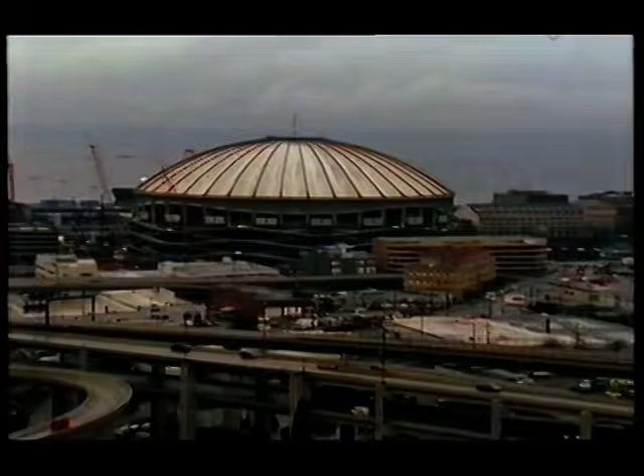From the very start, they knew the project was going to be their most difficult. Oh, on a scale of 1 to 10, the Kingdome is a 15. And it's not just the complexity of the structure itself, or the size of the structure, it's the political climate surrounding this project is unbelievable. That's been a little intimidating, I think, for everybody, just because there's so much going on. There's such a circus happening just beneath the skin of this whole project. You almost have to realign your priorities every morning and remind yourself that, hey, we're here to do a job. I have to go to work.

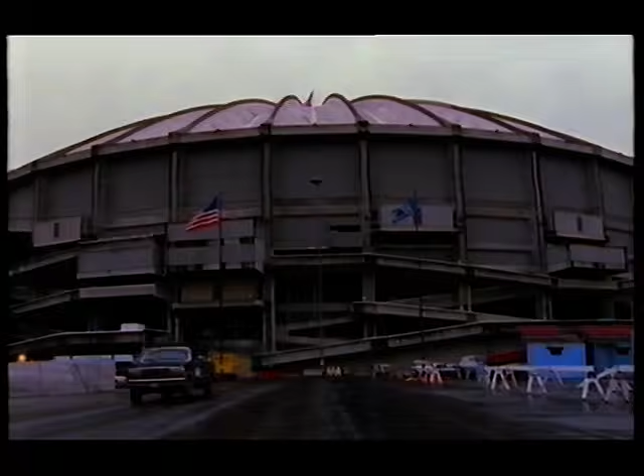The Kingdome is home to the Seattle Seahawks, who are owned by Microsoft co-founder Paul Allen, third richest man in the world. He's decided to build a new stadium for the team. But first, he needs the publicly owned Kingdome destroyed.

Midfield. Great drop for Pittman, end zone, touchdown.

These plans have been strongly criticized, and the project is taking place under intense public scrutiny. There was a couple billionaires that came in. They said they wanted the public to build them a professional stadium, and they said we want it at this spot where the Kingdome was, which was a functional building, which we just built like 25 years ago, and it seemed absolutely moronic to demolish it.

It has to be a political project. I mean, we're dealing with one of the owners of Microsoft, Paul Allen, and his company is Vulcan and First and Goal, the Public Stadium Authority, which represents the taxpayers up here. Turner Construction, who is a client of ours and very important to us to really understand exactly how we fit in the political scheme of things. But the bottom line is the reason we're here is to bring the structure down safely while we minimize impact on the neighborhood.

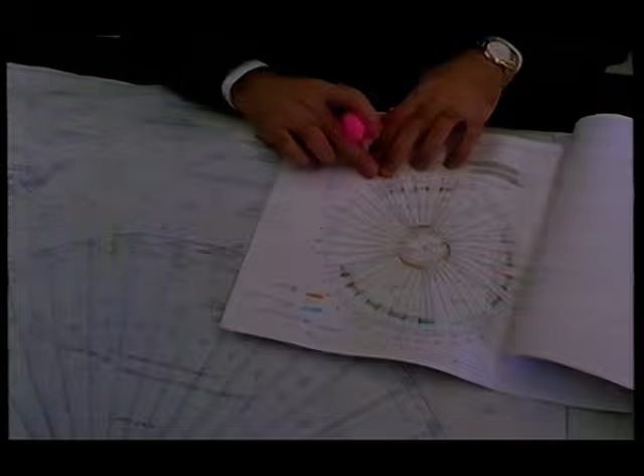Mark Loizeaux has been planning the demolition for 2 years, but the Seahawks have a winning streak, and the start of the project is delayed by a month. The main contractors for the new stadium, Turner Construction, start ripping out the interior the moment the Seahawks lose a game. They've got a very tight schedule. If we have to get pushed into the middle of April with the demolition, bringing the building down, then we've got some problems with the schedule. So that was one real concern, is making the middle of March with demolition.

CDI finally get their hands on the building just 2 months before the scheduled demolition date. We're just getting started, and we have, counting down, not much time. The whole roof is like a huge saucer, and if it hits in one piece, we really have problems with vibration. So if you look up, you can see that we have 40 different ribs coming down, and then we have a poured concrete grate in between each rib. So it's not only the idea of having to fell this structure to get it to pull away from the adjacent exposures, but to break it up sufficiently so when it hits the ground, it will minimize the vibration to the surrounding properties. And the real key is the timing.

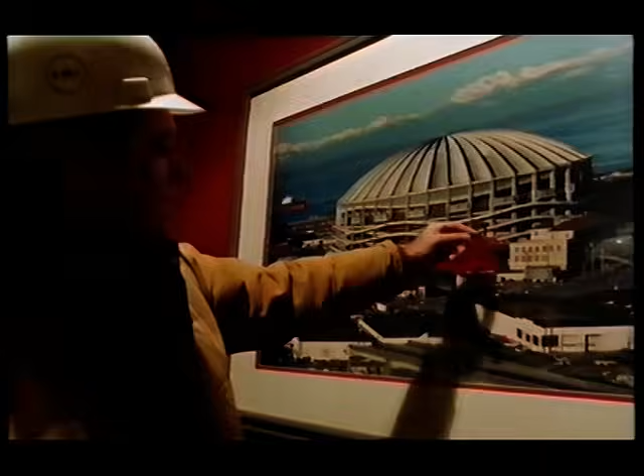It's only now that brothers Mark and Doug Loizeaux can check the blueprints against the real structure. As long as this hits first, and then I would go with this second. The primary areas that we'll be attacking on this, we've got the compression ring, which runs around the top. We have the tension ring, and we've got, these are called the XX columns, and another column row inside. So basically what we want to do is get the thing to fold in on itself.

One of the greatest things we have to overcome here is how to deal with the amount of weight that's coming down. All in all, in the above-grade structure, you've got about 110,000 tons of concrete in the superstructure of the Kingdome, and we've got to get that falling at different times slowly. We don't want that vibration to be sent over to adjacent properties.

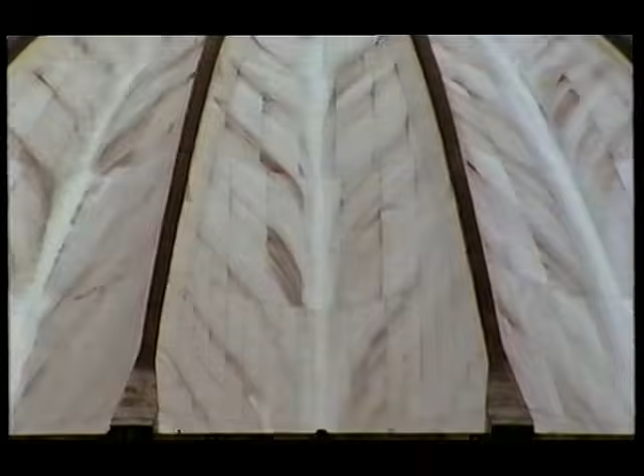Directly to the west side of the King Dome are the homes on Occidental Avenue, and they are most at risk. Tremors caused by 100,000 tons of concrete hitting the ground could cause cracks in walls and other structural damage many blocks away.

As well as controlling vibration, Mark has to worry about where pieces of the King Dome might fall. Very close along the east side of the King Dome runs a mainline railway that carries all the freight and passengers from the west coast to Canada and Alaska.

The distance from the outside face of the XX column over to the close set of tracks, it's about 62 feet. The main line is another 35, 40 feet further over. So actually, even if one of these columns fell out its full height, that would be bad. But they won't. You can see how close we are in proximity to the King Dome.

We're establishing liability agreements, certainly our legal department and our risk assessment folks. And we've had meetings for several months with both the construction company and Controlled Demolition, which are the folks that are actually going to do the implosion. So that everybody knows everybody else's needs, and we're all quite certain what to expect and what to be prepared for.

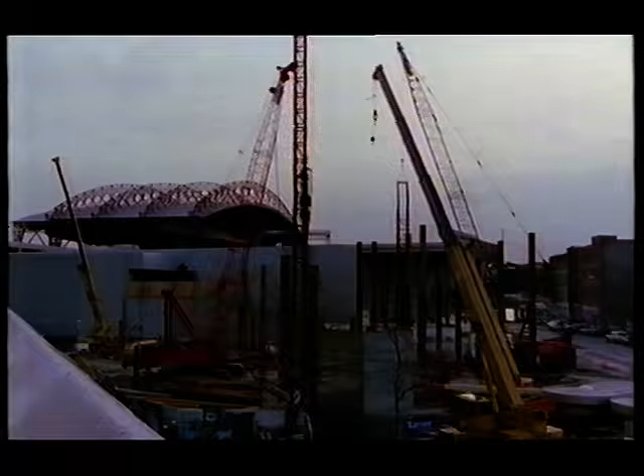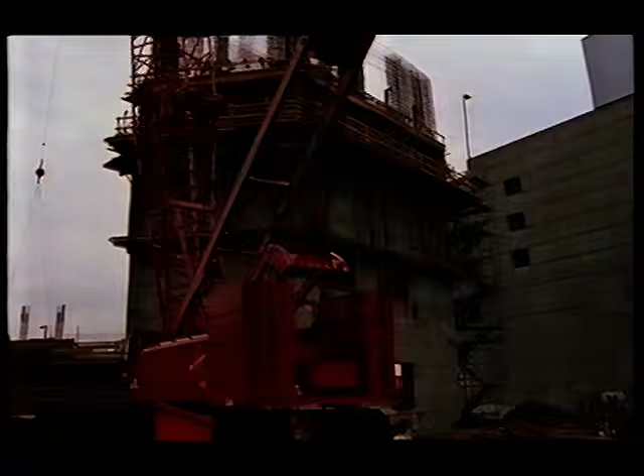To add to Mark's problems, the new stadium is being built to a strict deadline, so its stair and lift towers are going up before the King Dome is demolished. The foundations that underlie this stair tower and the one over there are absolutely critical to the whole new construction schedule. If something were to happen here, for example, with column number 39, I was just stepping off the distance just to check it. If one of these got loose and got into the stair tower, it would automatically push back stadium construction by months.

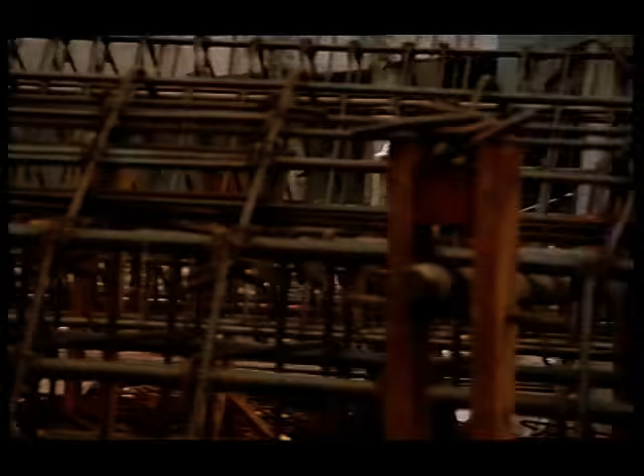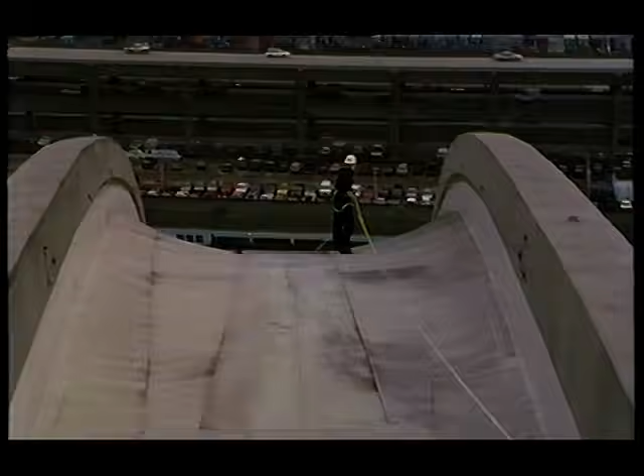The Loizeaux have never before had to work on a roof as high and as steep as the Kingdome's. Doug Loizeaux and Ray Zukowski, a CDI supervisor, are trying to solve the problem of working safely on the 300 feet high pitched roof. They're going to fab it on the ground. They're going to prefab it. They're going to roll it in. So it's rolled into itself. Come up, pull it off, lay it on the ribbon. The roof is going to cause more problems than anyone realizes.

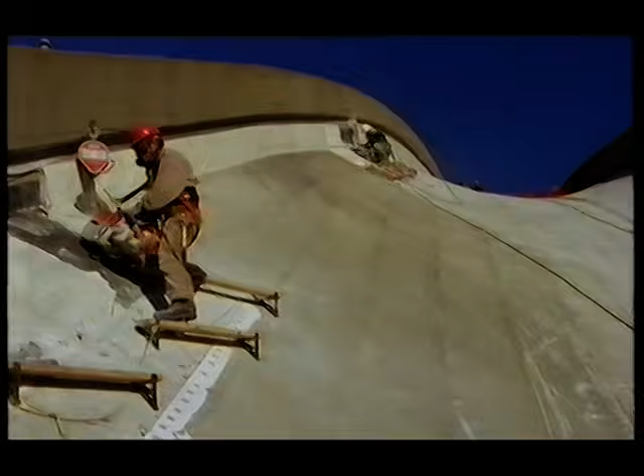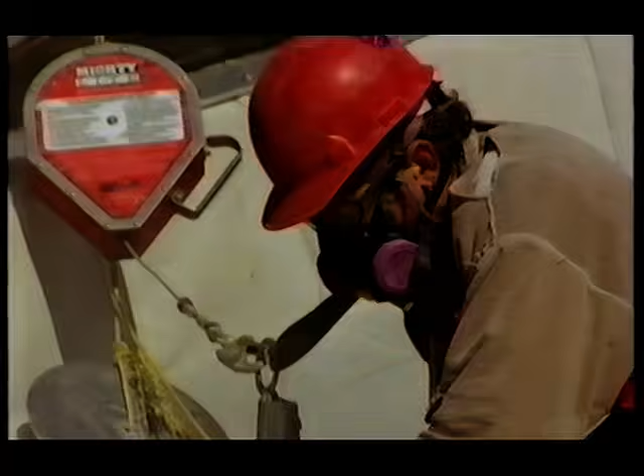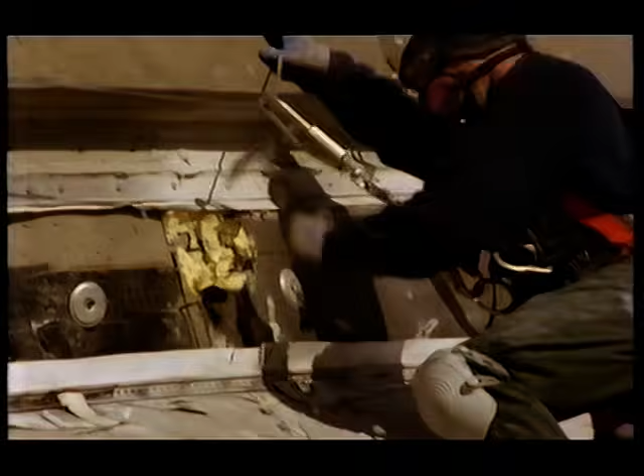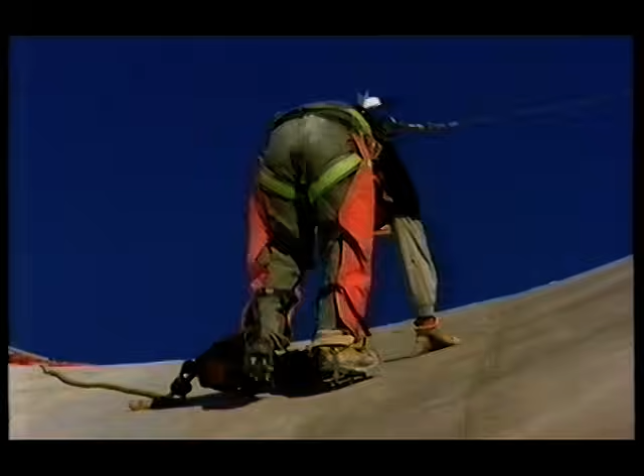Turner Construction planned to use recycled rubble from the Kingdome as foundations for the new playing field. But the roof has a rubber and styrofoam lining that will cause contamination if it isn't removed first. No one knows how long this is going to take. Climbers have been recruited for the job, but it's back-breaking work. Doing anything takes 10 times as long as it would normally.

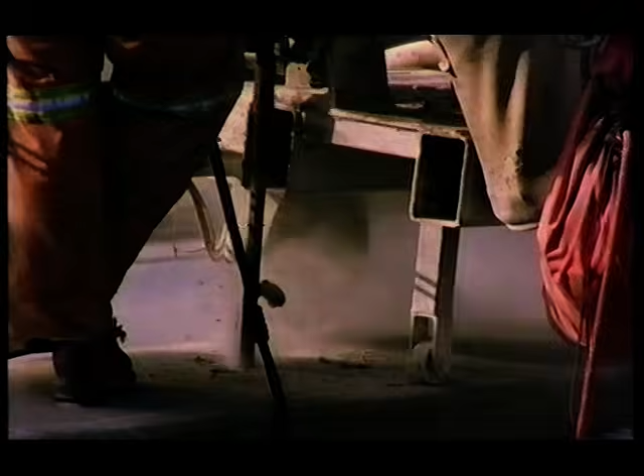Almost 6,000 holes have to be drilled before the explosives can be inserted into the columns and the ribs of the Kingdome. It may not look it, but it's high-precision work. The holes have to be accurately positioned and drilled to just the right depth. This will take several weeks. But the drillers are delayed waiting for the plastic to be removed. After 3 weeks, it's clear that everything is falling way behind schedule.

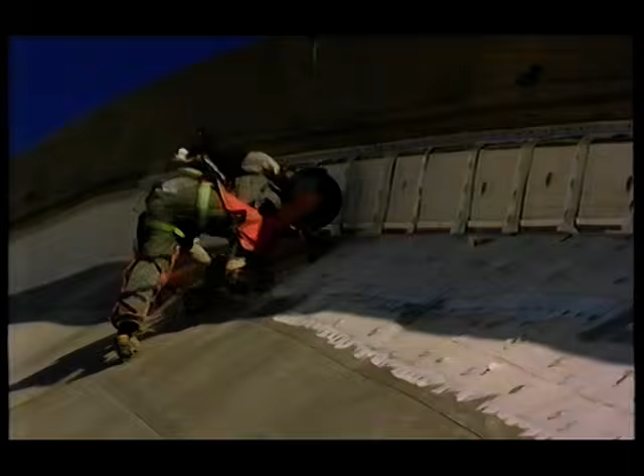Our slowest point is still the roof removal. It's just a slow process. Their original estimate was to do a bay a day. Right now, they've been there for 3.5 weeks, and they've done 4 bays. Plastic covering was fixed to the roof by steel pins. These also must be got rid of. They're very thick. They're approximately 7 inches tall.

And to remove the roof, they cut off the top section. Most of that's done on an angle. So that basically turns into a 7-inch nail pointing upwards. Our potential problem is if someone were to slip and fall, you would land on that, you would become a pincushion. I think there's almost 1 million of them up there. Now in the flat section alone, that took one man almost 2.5 days to do with a small grinder taking everything down flush. So if you did fall, there was no chance of an injury.

If I had been the first person here to look at this, I don't think I ever would have taken it on. It's so intimidating. It's so big. And the heights we're working at, just all around, walking on the roof. I mean, there's so many inherent problems and dangers and logistical difficulties that it's been a bear.

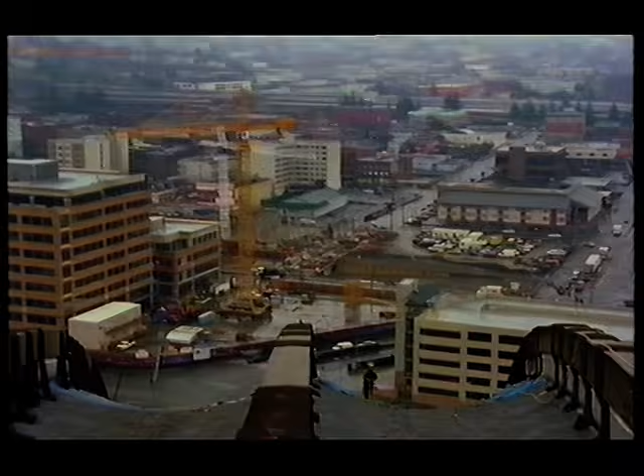Faced with the log jam on the roof and the delays caused by worsening weather, CDI sees a tight schedule become even tighter. But there's little they can do except wait. And so another job 1,000 miles away becomes no problem. It's the Mapes Hotel, Reno's first hotel casino. Like the Kingdome, it's a landmark building, a piece of Reno history. And like the Kingdome, there's been a lot of arguments about its fate.

Changed the image of Reno overnight from a hick town, cow town, to a sophisticated little city, that one building. Some of Hollywood's most famous stars were guests here. Marilyn Monroe, Clark Gable, John Huston, Eli Wallach, Montgomery Clift, Frank Sinatra. We've been fighting for 2.5 years to save it, and with not too good results. The campaign to stop it being demolished has failed.

It's much smaller than the Kingdome, but on closer inspection, it's not as easy as it looks. On one side, it lies on the bank of the Truckee River, which is clear and so far unpolluted by debris. And on the other, on busy Virginia Street. Same premise that we had on the Herald's building. Doug is shocked to discover the hotel isn't safe. He calls a press conference to announce the bad news.

The structure is not built as we anticipated. It's very lightly constructed. There's very little reinforcing in the building, and the concrete's in pretty bad shape. So the decision that was made to take the building down is a good one. I know a lot of people felt really close to this building, from the historical aspect, but this building really isn't sound. They've also just found out that a structural girder connects both wings of the hotel.

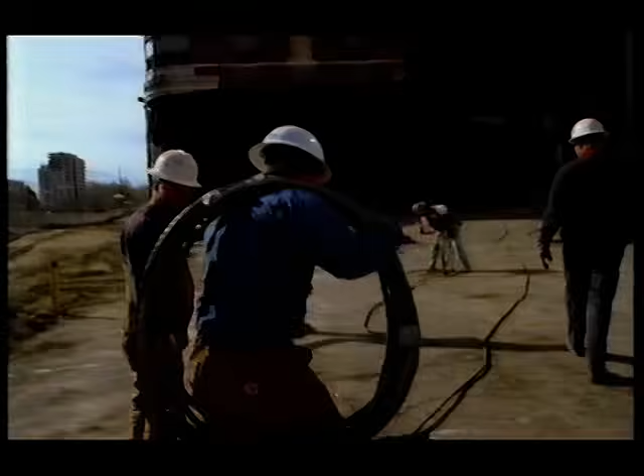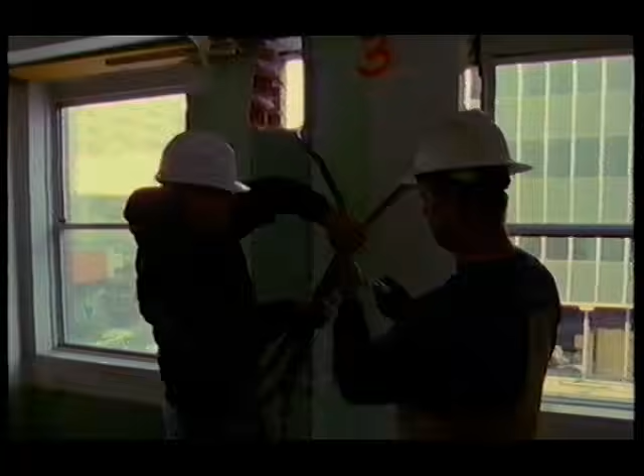Keep in mind, we don't make buildings do things. We want them to do what they want to do, come down, just our way. It's fighting with me right now. It doesn't want to cooperate. Mark's solution is to use steel cables in the building. They tie columns in the front of the building to columns at the rear. When the hotel collapses, this should prevent the walls falling outwards and should pull the front of the building away from the street. The cables need to be as tight as they can be.

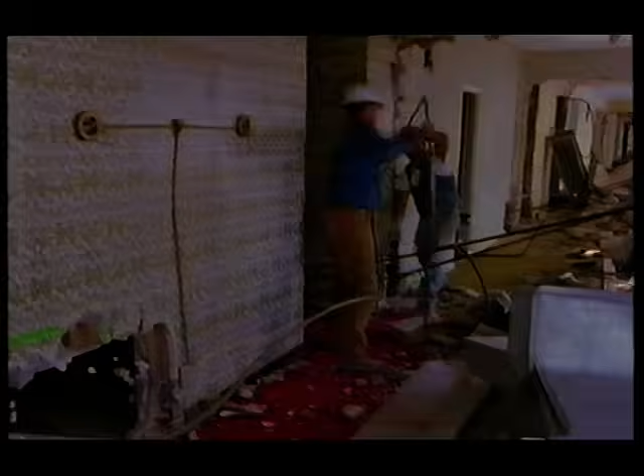What they're doing here is they've already put plastic on the windows if they could. While this goes on, Mark and Doug hold a brief meeting to discuss what to say if the job goes wrong. As far as I'm concerned, we will have material in Virginia and the Truckee River. For those of you who never got a chance to look, all those bump-out bay windows are just set in there with friction. They aren't even pinned, and they probably are going to come out. If you are in the vicinity of media or people who are interested in what is going to happen, let them know this is what we expect. If we do better than that, thank you.

It's the morning of the demolition. The police have talked through the countdown by Doug. You don't need to sweep your people again. Tell them if they see something, stop the countdown. Meanwhile Mark takes the last chance to steer the media in the right direction. It's a very light building, and that means it's hard for us to move it away from the Truckee. It's hard for us to move it away from Virginia. So we can only do the best we can.

Jamie's clear. Hook up the blasting machine. Jamie's all hooked up. Chuck? Still got a minute, Doug. Ray, are you clear? In the red. All right, here we go. 10, 9, 8, 7, 6, 5, 4, 3, 2, 1, fire.

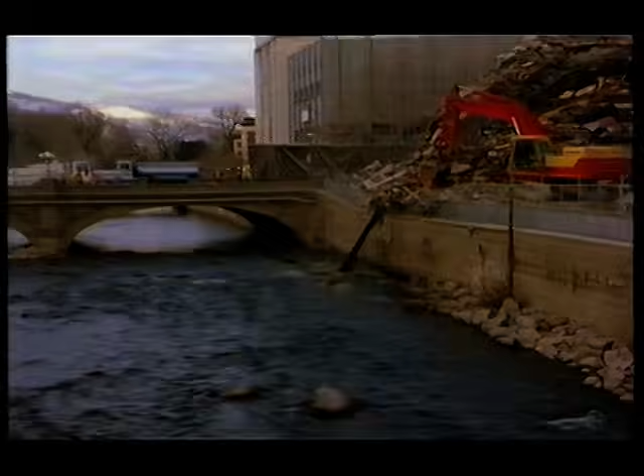You see it cut through. I went in. I pulled the back 2 columns, the next 2 columns, and pulled them forward 2.5 delays. I cut straight through the way you had it originally. I'll tell you what. And I just shortened it. I kept pulling forward. This corner almost was parallel to the river. Well, it was now. It moved in. The rubble, though perilously close, has not spilled into the Truckee River, except for a few pieces of stone.

Look at the rubble, it's beautiful. All right. Breakage is great. Good job, sir. I think your bomb squad could have done... Good job. Nice image, that flag coming out of the dust there.

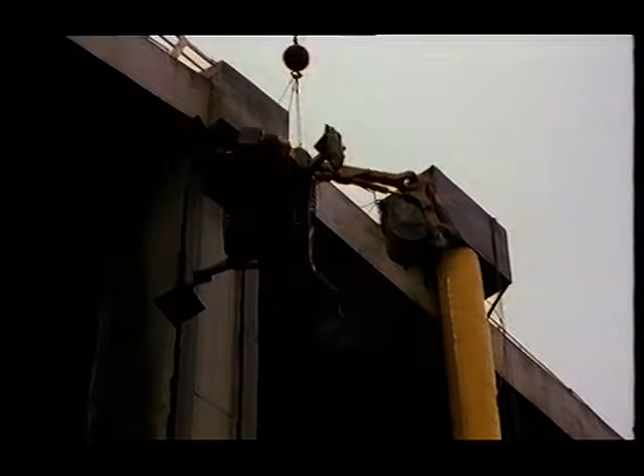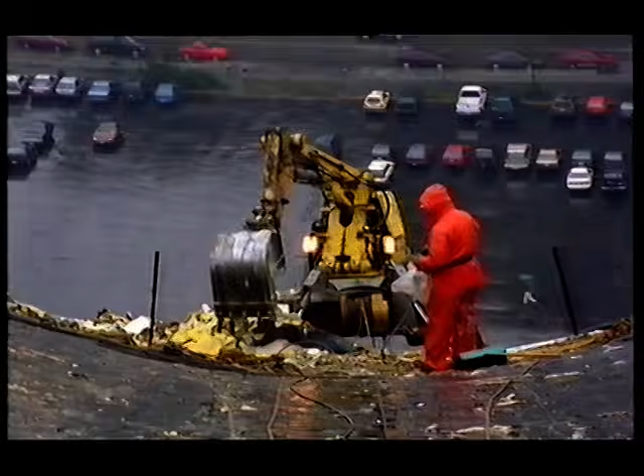But the problems of the Kingdome will not go away so easily. With the walls and cladding now removed, the supporting columns have been revealed. The Loizeaux team can finally get down to their work. And they've found a mechanical solution to the delays on the roof. It's a remotely controlled digger. Work on the roof speeds up at last, but the delay will add to their pressure.

The scheduled demolition date is just 4 weeks away, and in the dead of night, the first consignment of explosives is delivered. Mark Loizeaux thinks they'll need 2 tons, a massive amount, 50 times greater than was needed at Reno. It's such a large amount, the order had to be placed before their plans were finalized.

Now they need to do a test explosion on the columns holding up the dome to see if their calculations are correct. Their biggest concern is the larger outer columns, called the XX columns. What's important is these columns are really the key to the whole project. In certain areas, we have to drop these vertically. Other areas, we have to use them as a hinge to help fold the walls in. The steel is so heavy in this column, and we're only blasting 2 holes. We aren't going to displace the steel.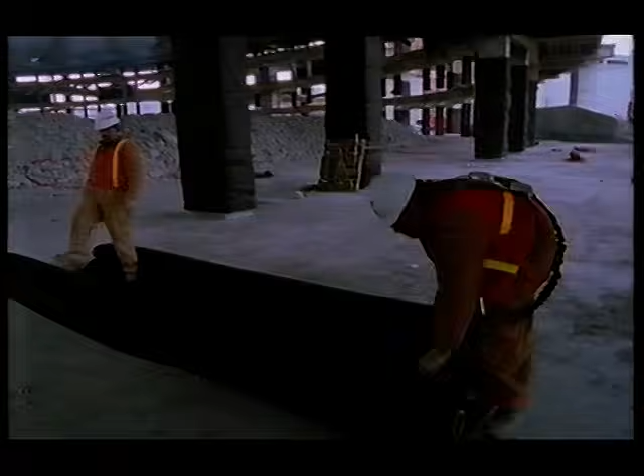The areas of the column to be blasted are covered with wire mesh and a black fabric to hold back flying debris. Okay, Jim, we're in position. Everything checks out, and I've got accountability for everyone. Okay. Fire.

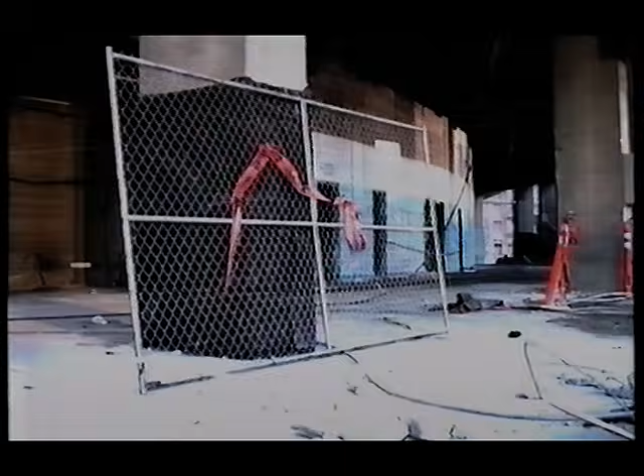The dynamite was powerful enough to displace the concrete, but it's only blown half of it away. It means the columns may not fall properly and could damage surrounding properties. Mark and Doug meet to work out why this happened. They suspect the holes are in the wrong place.

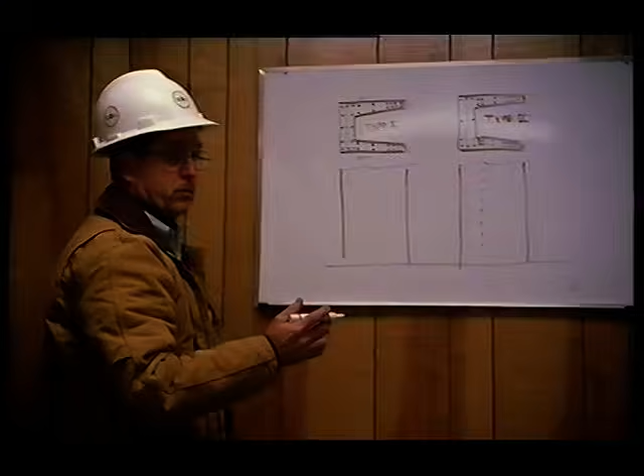Basically, the energy is going the direction of least resistance. Everything is coming this way because of the support line here, the support line here, and the drilling operation, call it quality control. That's going to want to push that column backwards. Yep. It's going to be fighting against the tension of pulling those columns in. I mean, these columns will reach all the way across Occidental.

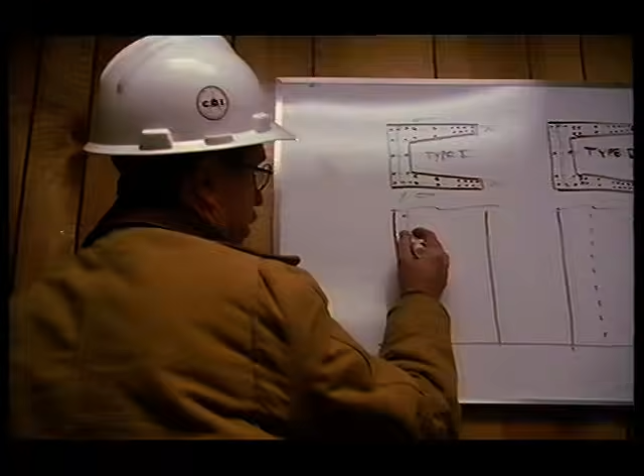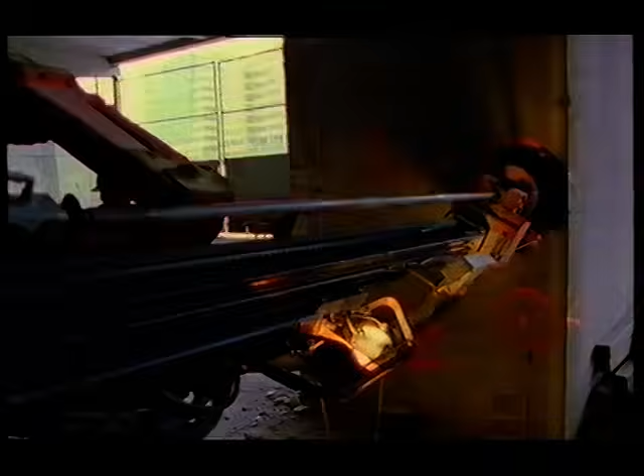I think that we need to do away with this hole, re-drill 2 more holes on the y-axis and every single column on plaza level. I don't know that you want to do away with those holes. I think that you want to load both of them. Oh, that's a thought. That's great. Extra holes have to be drilled, causing further delays.

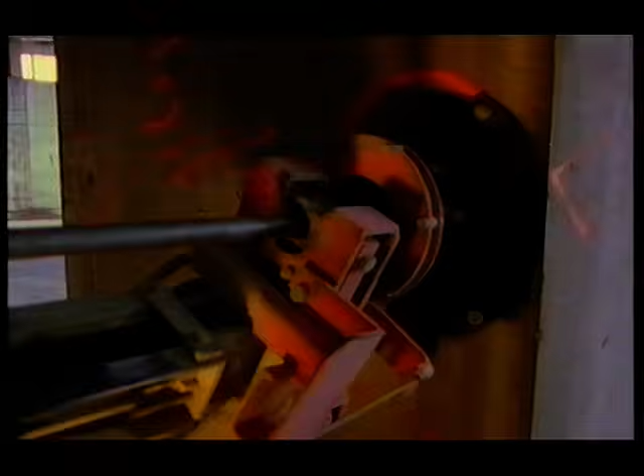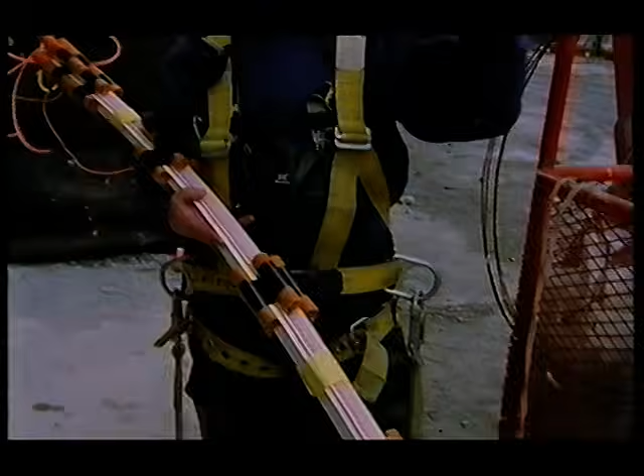But the Loizeaux have made one decision that will save them a lot of time. Way back, we decided that it would be a heck of a lot easier loading these very deep holes if we pre-made the assemblies. And since the loads were pretty consistent, we decided that we could take this plastic channel, pre-cut it to a determined length, and space the charges out on it. What this saves us doing is, instead of going to a column, loading your primer charge, putting sand into this exact dimension, putting another charge, putting sand in, putting another charge, putting sand in, you just slip it in, foam it out, and it saves you 5 minutes a hole.

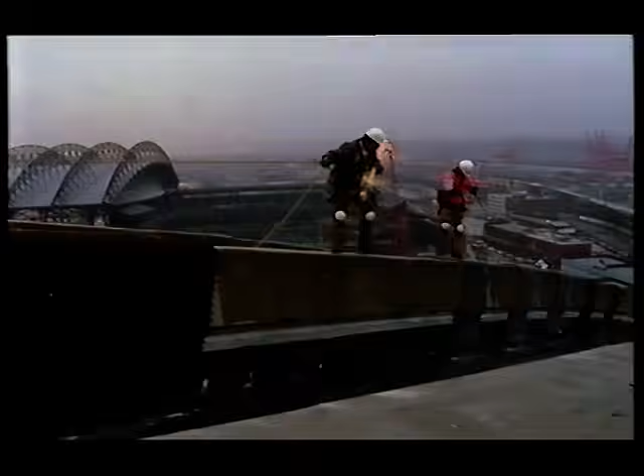The prefabricated charges are laboriously carried up to the 300-foot-high roof. Sure, take one. There are over 400 of them to be loaded into the roof ribs. Inching slowly down the ribs, they don't have time to enjoy the view.

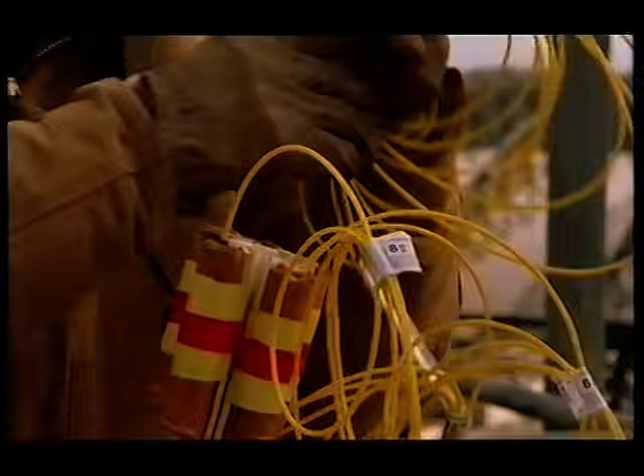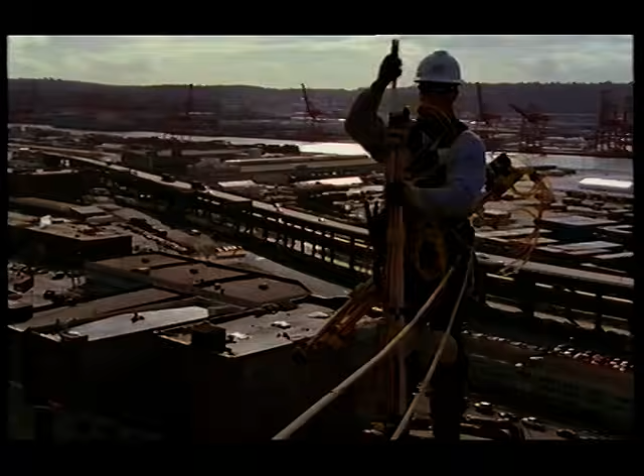There obviously are hazards inherent to working in an elevated place like that, and the ribs themselves are very narrow. And you've got all this climbing gear on, and you're trying to hassle with ropes, plus you're trying to carry charges, plus you're trying to carry stemming. So that's really the only part that gets it all interesting, the fact you're trying to juggle so many different operations at once. The charges are spaced throughout the 6-foot-thick ribs. Each section of the rib needs a different charge, and the work is carefully monitored.

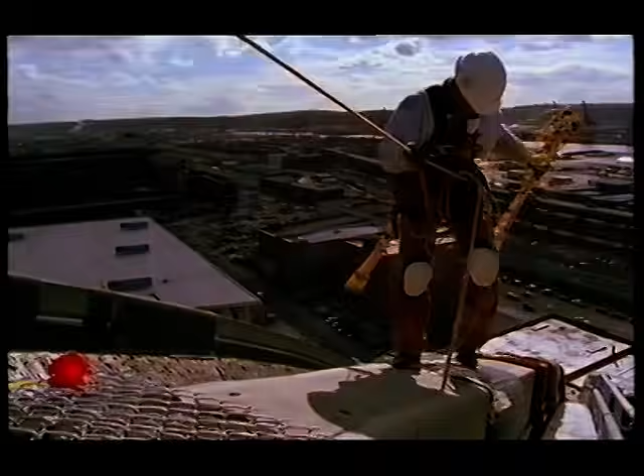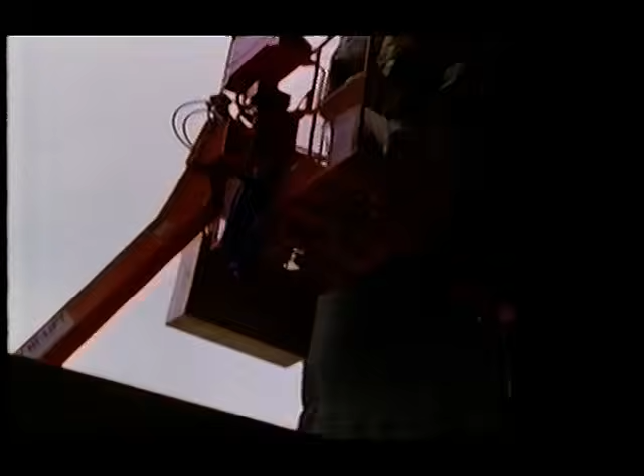After these have been loaded, it's the turn of the 145-foot-high columns. Access is difficult here too, and perched on an exposed 100-foot man lift, the task seems insurmountable. I think the biggest problem with this job has been time. It just seems to keep slipping away from us. And there's so many concurrent operations going on.

There's so many things that this can't happen until this is completed, and we're crawling all over top of each other. We've got 3 man lifts working on the same column. It shouldn't be happening. We're working on Sunday. Again, it's just getting down to crunch time, and we've got a week left, and it seems like we're close to being finished, but there's a lot of work here to do yet.

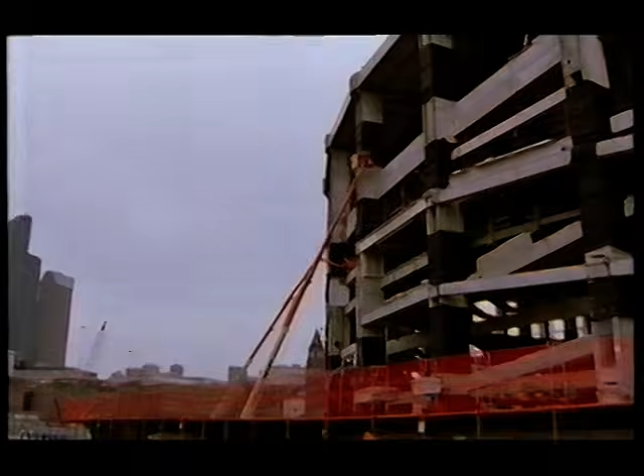Ray thinks Stacy Loizeaux deserves a reward. Lollipops. Yes, Ray has very calculatingly implemented the star system on this job. So a good deed gets a silver star. If you accrue 5 silver stars, you get a gold star. Gold stars are hard to come by. I've got 2 now, don't I? 2, right? So what do you get if you get a gold star? A gold star.

It's now just 5 days to the scheduled demolition day. Despite the lack of time, the Loizeaux team are beginning to feel that they will hit their target.

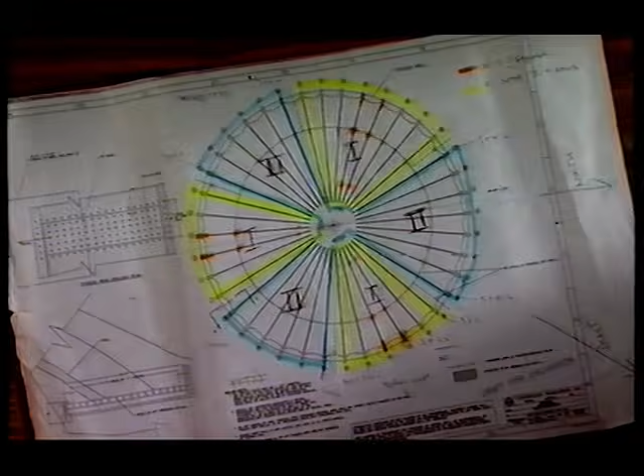Yep. Stacy and Ray begin to connect up all the charges which are now in place in the roof ribs. Making the roof fall down correctly is the key to a successful job. Mark has worked out a way to reduce the vibrations when the dome hits the ground. His plan is to make the dome collapse in different sections that he calls Phase 1 and Phase 2.

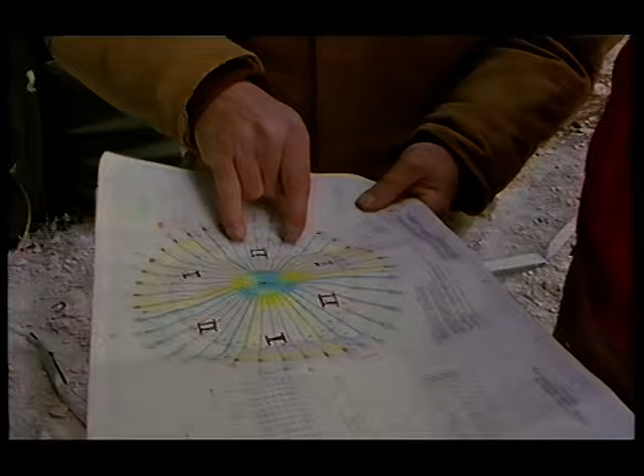The thing that I want to do is swing this in. We're in Phase 2 right here. I'm thinking seriously about releasing all of these simultaneously, Doug. There's a whole lot of advantage in doing this. We keep down concussion. Each rib and column of the first half, the yellow section, will be detonated separately 1.5 seconds apart. Then the blue section will be exploded all in one.

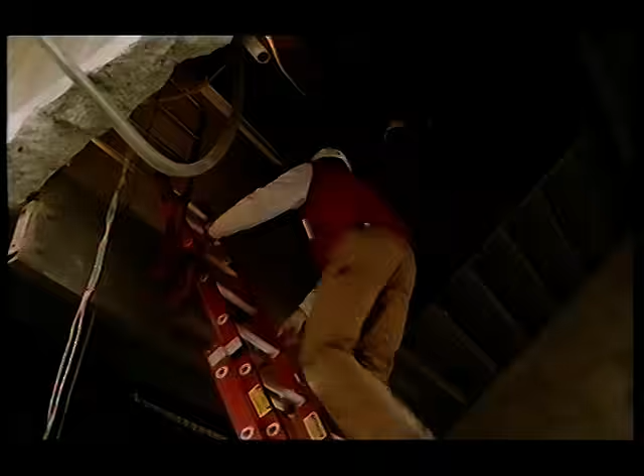And if we let that rotate over here, in the middle of Phase 1 here, Phase 1 here, Phase 1 over here, it's going to drop, and there's going to be a deflection in the tension ring. The ribs right above that are going to fire, and also the tendons up around the compression ring at the very top will fire. It creates flexibility in the center of each of the 3 Phase 1 sections. And as they begin to depress, sequentially, the columns are going to start firing out from that into Phase 2. Those two, I'll step back.

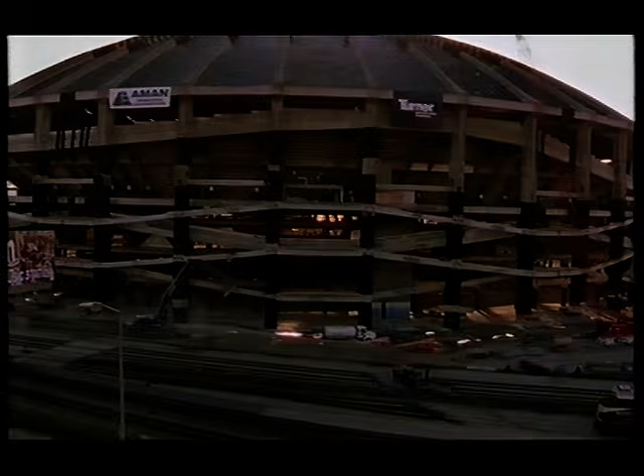They hope to control how different pieces of the Kingdome fall by using timed detonators. The detonator is initiated by the detonating cord, which is clicked into the J-clip. When the cord detonates, it sends an explosive pulse through the shock tube. The shock tube then hits the detonator itself, and the internal timer burns.

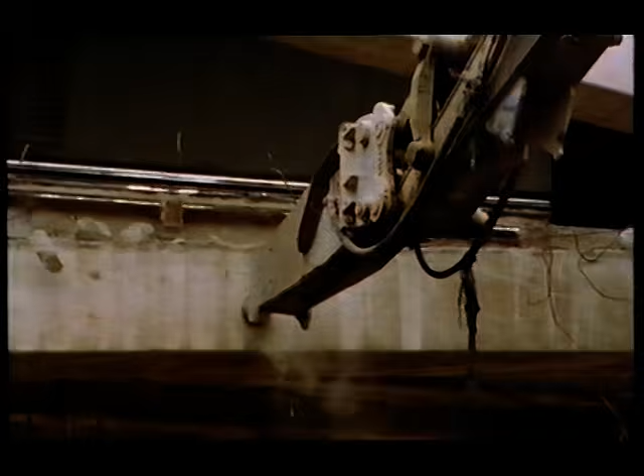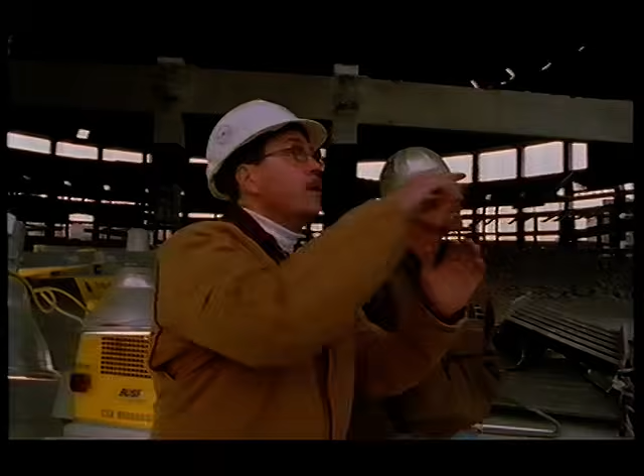And at 3 seconds, at the predetermined time, it will detonate about the last ½ inch of this cap. And when that is inserted into the dynamite, put in the hole, then the explosive detonates and does what we want. No hammer, just push. Mark wants some supporting beams weakened to help some sections fall first.

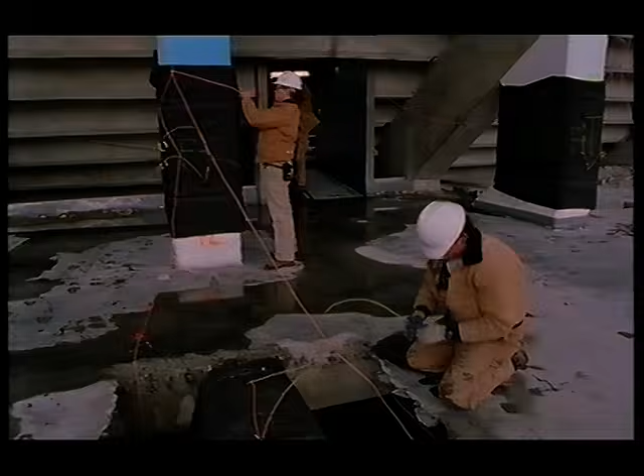Get Phase 1, here are the Phase 1 columns. Also, over here on Phase 2, this is the 8-column section. Grab this one and this one. Time is running out, and despite being the boss, Mark lends a hand in the laborious job of connecting all the charges. They will have to lay more than 19 miles of detonating cord.

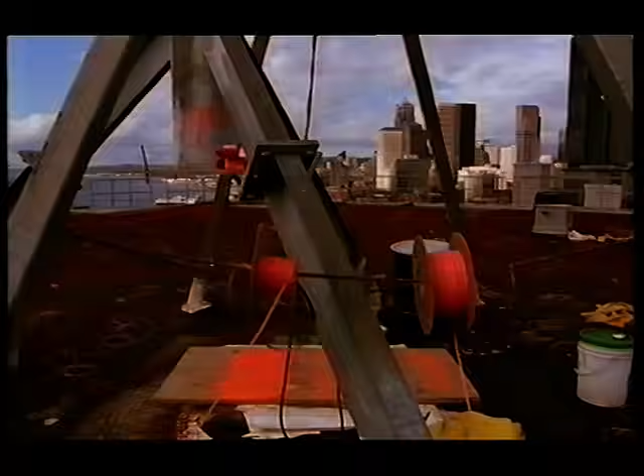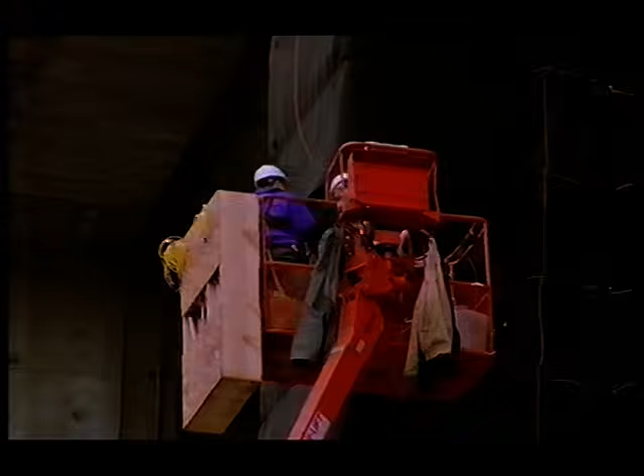Each phase of the Kingdome is connected with timed detonators to introduce the short delay required to spread out the impact on the ground. Stacy inserts the delays between each of the columns so that the circuit of detonating cord is complete. With detonators in place, the dome is now in a highly dangerous state. This is the most sensitive part of the entire system, the detonator.

You look up right there, you can see where we've softened these beams. So you've got pieces of loose concrete up there. If the wind's kicked up or something like that, potentially you could have loose concrete fall down, hit one of these caps, and this whole phase is going off. Check the badge. Nobody. Mark warns the rest of CDI to be careful about who else is allowed into the building. I'm just very, very concerned about the pressure sensitivity of the caps that are laid out as we speak on the floor of the Kingdome.

And it's really important that we be sure that everybody is out of there. For example, the man lift over there working on the sign. That guy had stuff in the man lift. He had a pair of pliers that could fall, hit a cap. That's what I just told Rich has to stop. He said if necessary, we'll take the signs down. That's a good answer. But we have something over there that is sensitive to pressure, and if one of those caps goes off, the entire structure is coming down right now.

And I want all of us to be watchful of that because the other people don't appreciate it. We keep telling them and they're not listening, and we have to drum it into them. So please keep your eyes open, right? That's all I have to say. The solution is a simple sandbag placed over the detonators.

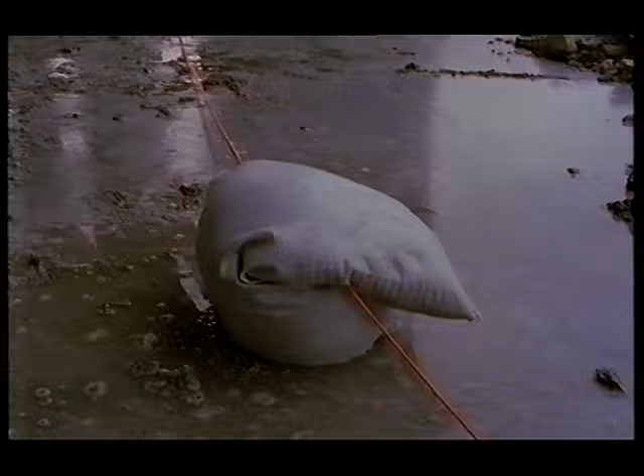The Loizeaux company has been in existence for 50 years, and in that time has blown up every type of structure. With the Kingdome, they are risking a reputation that is second to none.

Local interest is intense. Just 2 days prior to the implosion, a local TV station broadcasts an interview with a bitter critic of the Loizeaux company.

Broadcasting in HD TV from Digital Studio A.

I have heard concerns from every blaster in the industry because of the recent problems. October 9th. The news item attacks CDI's record, highlighting a few errors made over the years. Beams crush an elevated train track. Their reputation, it alleges, is now in the balance. December 96, the Hacienda Hotel in Las Vegas. Part of the south wing is left standing. February 96, CDI implodes the old airport runway bridge in Denver. A portion refuses to fall.

They have had several problems lately. The Kingdome is a very, very big project for CDI. If it does not go well, there will be even larger credibility issues than there are now. The high-profile nature of this job is beginning to rebound on them. Anytime you stand on the top of the ridge, you're an easy target. And we certainly are on top of the ridge in this industry.

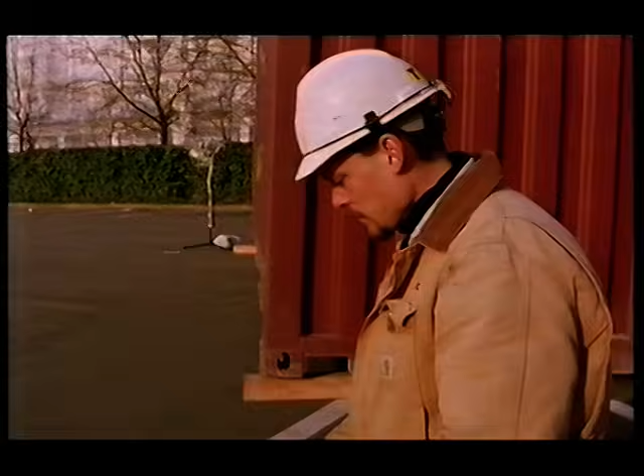Ray sets up a firing position. We have three separate electrical series in the building. We have a series initiating the roof, and we split the arena level into 2 different series. All of those series run into the bus line, which is running out here. Just 2 wires lead to the Kingdome, where 2 tons of explosives wait to be triggered.

With the public relations over, Mark joins his daughter Stacy inside the Kingdome. It's the last chance he's got to make sure that nothing will go wrong and that everything has been double-checked. All right, so the 2 series, obviously the roof is 1, and you decided to split it where? Right, basically at the elevator shafts, we just bisected the arena. So this side over here, you're right in the center of a phase 1. And this side over here, you're in the center of a phase 2. Yeah. That's good. And we went very methodically, tying in, checking resistance, and it all jived.

Be glad when we're sitting in Las Vegas, having a drink. I understand that. Why on earth did we take this job?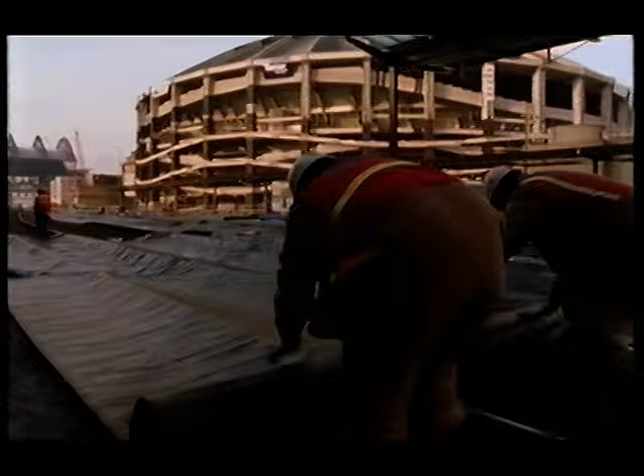The covering for the railway tracks is rolled out. It may stop dust, but it will offer little protection against any heavier debris. As the crowd gathers, a safety officer gives some last-minute advice. Please, put your dust mask on if you have it, and remember, remain calm, dust won't hurt you, even if you don't have a mask. The thing to remember is, if you decide to move away from it, do it calmly and slowly.

He's not bad. He's pretty well informed. Somebody in the front decides they want to get out of here fast, people in the back are going to be in danger. The problem is the wind is blowing right here. It's coming right across these people. So this is one of those cases where being in the front row is not a good idea. The residents of Occidental Avenue have to be evacuated. And as they are given free breakfast in a nearby restaurant, they can do nothing but wait and watch.

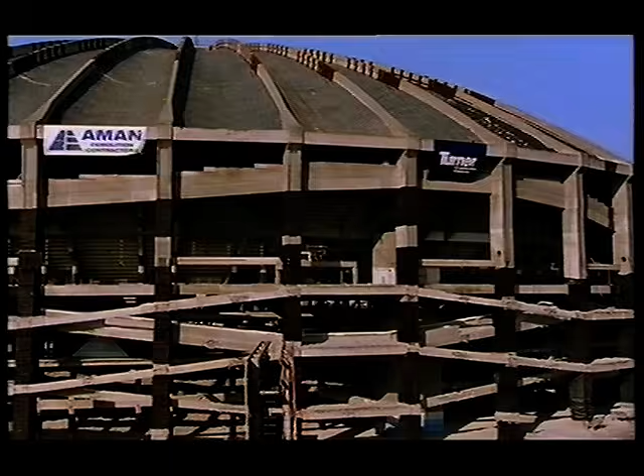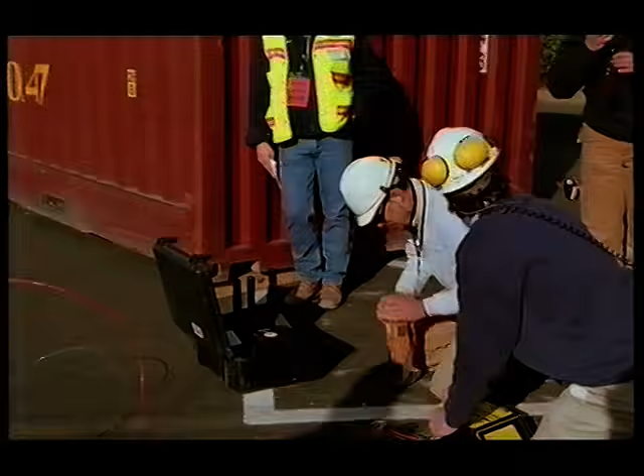Stacy, are you clear? Clear. Mark, are you clear? Clear. Not yet, Jim. Seattle holds its breath. Keep your eyes up. CDI, 10, 9, 8, 7, 6, 5.

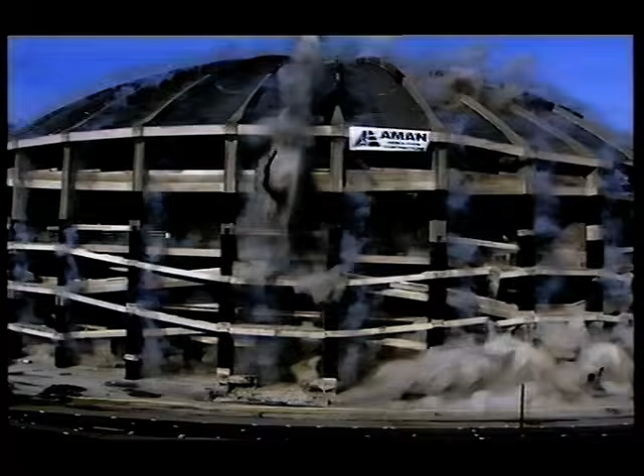Mark and CDI have survived the pressure and the criticism to pull off the perfect job. It appears that the entire dome, other than loose debris, is within the footprint. The tracks are clear. Occidental is clear, obviously, except for dust and stuff Bobcats pick up.

How do you look? Do you look good in gray, Devin? Right now, I think that everyone's looking better in gray than before. Yeah, the dust color, yeah. There you go. Thanks, sweetie.

Yeah, it is. It came real. I'll be honest. It transcended my expectations. I thought it was gonna hold up a little bit more than that. But basically, what we're looking at is the cuts that we did in the seating bents. Yeah. It came over and stopped and knuckled under. Yeah. And look at the holes where the tendons were. Yeah. Sucked them right out. Right out. Good job, Mark.